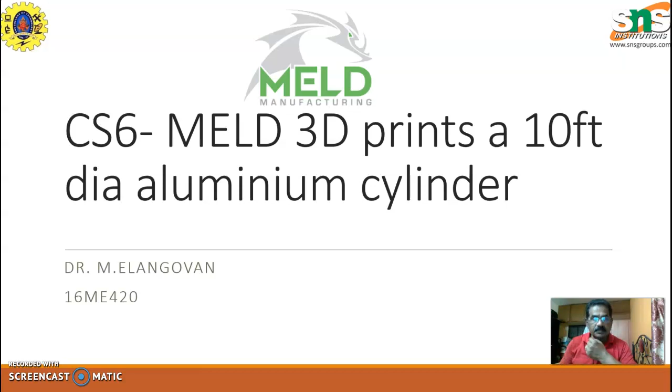The company is called MELD Manufacturing Company, situated in Christiansburg, Virginia. They hold a lot of patents for trying to do these kinds of unique things which cannot be done by any ordinary industry. They have a truly novel and innovative process for metal manufacturing. The traditional process, like melting metal, introduces weakness and other issues. This company MELD makes material malleable without melting, offering stronger, better quality parts.

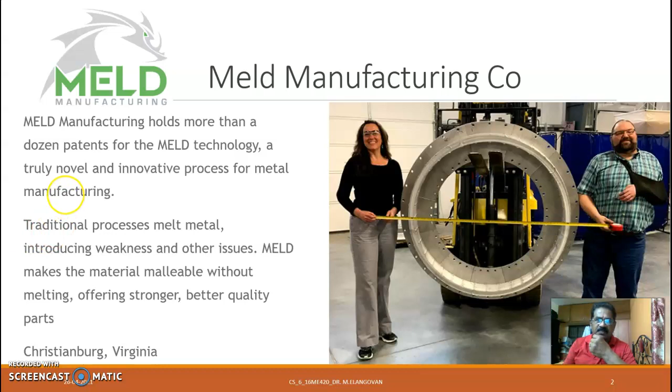Introduction to the case study: it is about the challenge of making an aluminum cylinder of 10 feet diameter. MELD Manufacturing Company has commercialized a unique friction consolidation 3D printing process, and they are able to make a 10-foot or 3.05 meter diameter aluminum cylinder using off-the-shelf aluminum - any ordinary aluminum, they're able to take it up and do it.

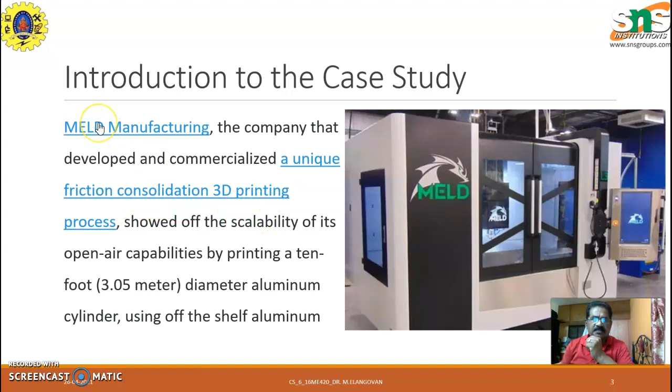The challenge is the size - the size of the component is a milestone for the company and for the metal additive manufacturing industry as a whole, trying to make such a big metal part. The MELD process allows the use of off-the-shelf metals in solid or powder form and creates fully dense parts, operating in an open air environment. That is the specialty of this.

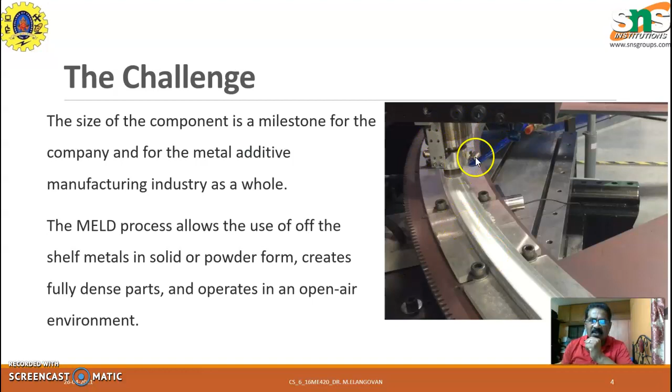You see the nozzle coming out here and the metal getting deposited here. This entire fixture, the table that holds the 10 feet diameter cylinder, rotates, and here again this nozzle also rotates about its axis. Now you can see how the deposition takes place - the layer of deposition, and all the layer marks piled up one over the other can be seen. The process takes place in an open atmosphere.

This means no special chambers or vacuums are needed - that's a great advantage. This flexibility not only means less equipment and cost, but also increases scalability and allows you to make parts bigger, better, faster than other processes. That is the challenge that this company is able to take up and accomplish.

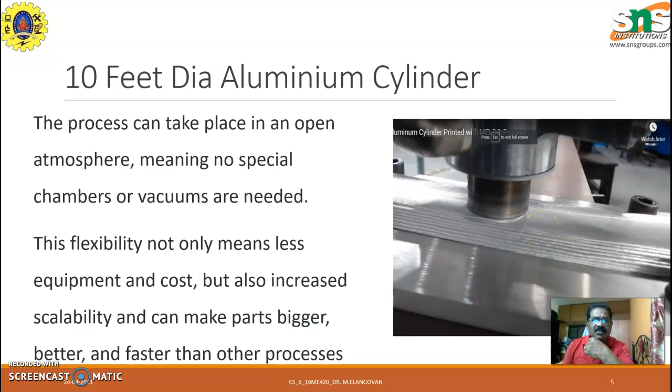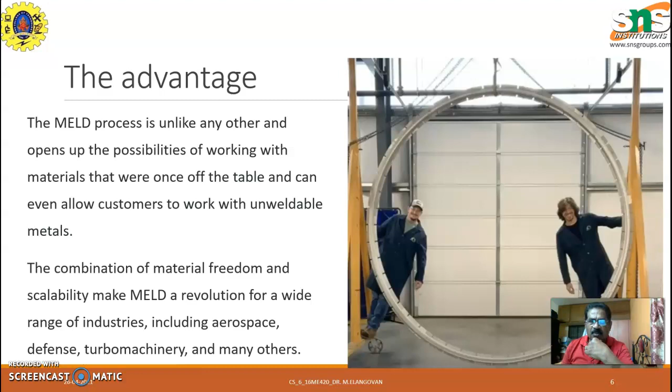The advantage of this is that, unlike any other company, it opens up possibilities of working with materials that were once off the table, and it can even allow customers to work with unweldable metals. They don't have a specific kind of restriction - anything off the shelf, any kind of material can be MELDed and they can try to do it. Things which even cannot be used for welding can also be used. The combination of material freedom and scalability makes MELD a revolution for a wide range of industries, including aerospace, defense, turbo machinery, and others.

This is the process shown, done through additive manufacturing. Here you see the MELD tool, and the metal comes out here, and then the deposition takes place over the substrate.

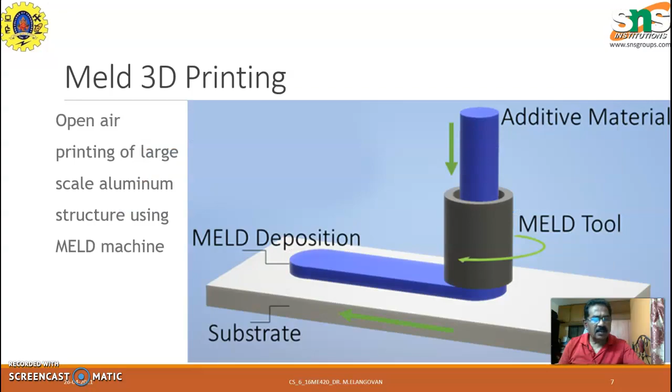Let us go and look at the video of this case study.

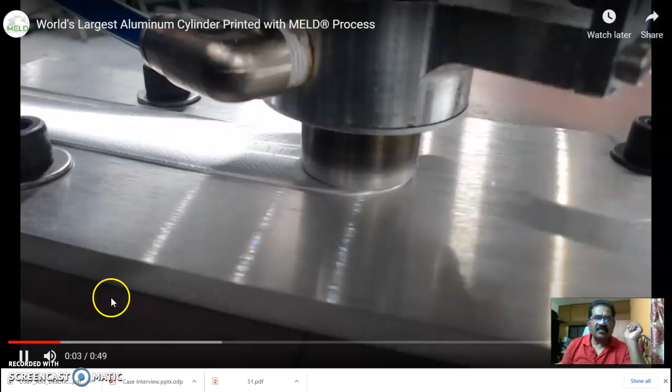So that's it, let's have a look at this. Let's see the video here. I'll just play it out a little so we get a sense of this entire process of making this 10 feet cylinder. Can you see the metal getting deposited here?

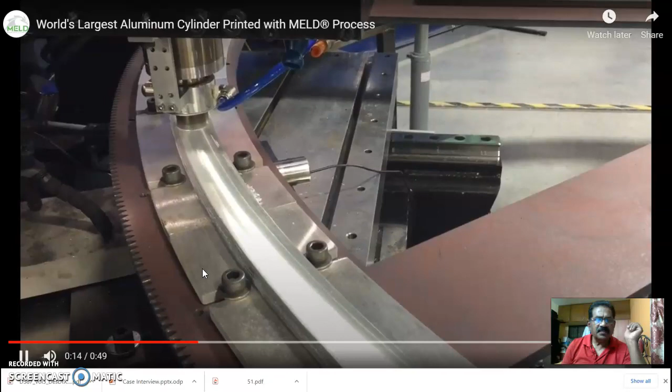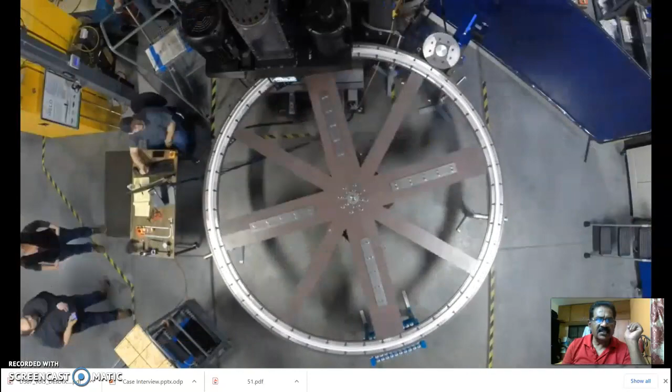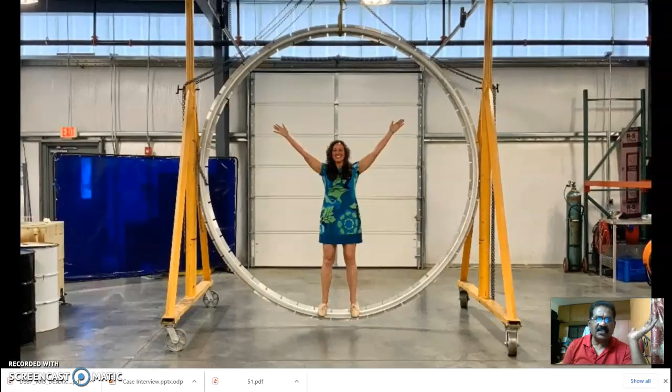That's the fixture, and the tool also rotates in its own direction about its axis. See, the part is here. This is taken from the top view, and this is how the cylinder gets built. Very similar - you may recognize this as similar to the friction stir welding kind of process, and its strength is being shown here.